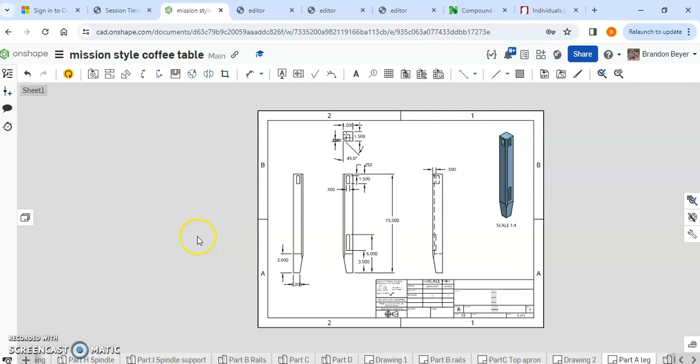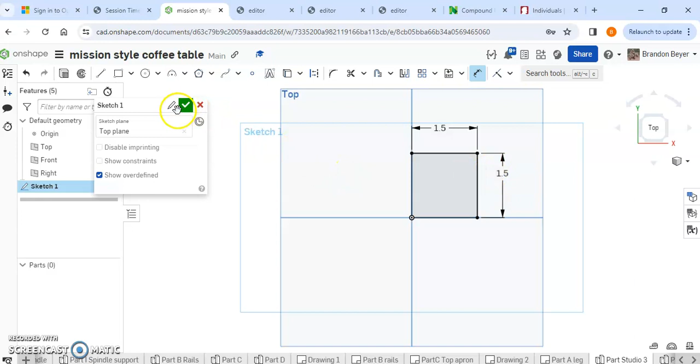Starting from scratch, using Onshape, we're gonna make a sketch on the top view, and we're just gonna start with a nice rectangle. The outer dimensions of this leg are 1.5 by 1.5. We're going to extrude that 15.5 inches, so we're going to make that 15.5.

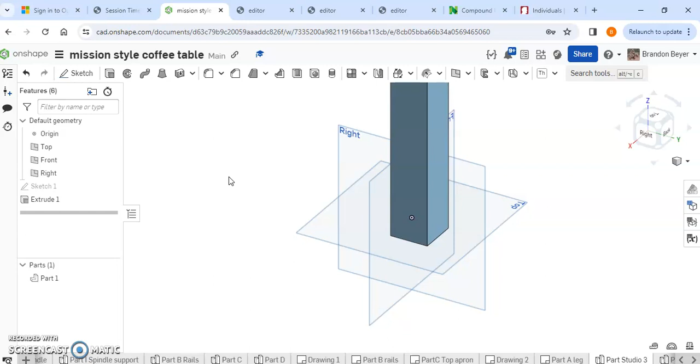We're in fast mode, folks. You got to pay attention. You got to work fast. If not, you'll have to pause this video and go back and watch it again.

So we're already 15.5, we got the bulk of the leg already done. 2 steps. Nope, we're on a video, you're going to watch it later. I'm recording right now, your voice is now in the video permanently. Congratulations.

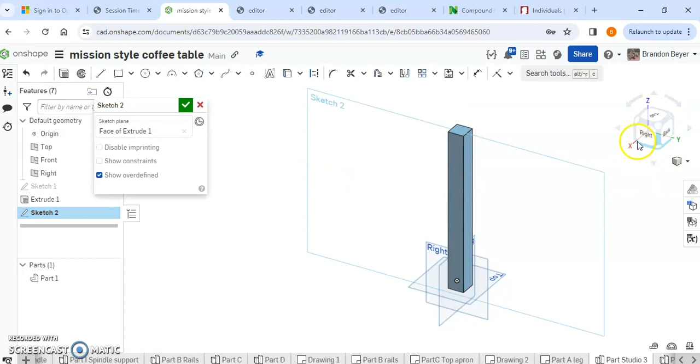Sketch, we're going on the left side here. I'm just going to draw 2 rectangles down here. You do not want those rectangles to be touching anything, so I'm just clicking a random rectangle in the middle there. I'll do the top one first.

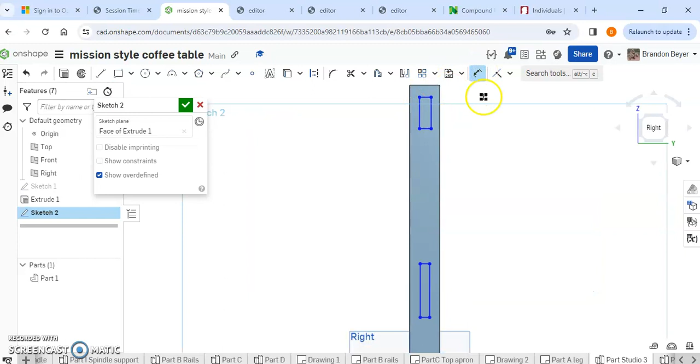Top edge down, that's going to be 0.25. Bottom of that top rectangle, if we look at our plans, it tells us that that is 1.5 inches down. How are you going to center your rectangle? It's going to be 0.5, and then I'm going to go to the edge, also 0.5.

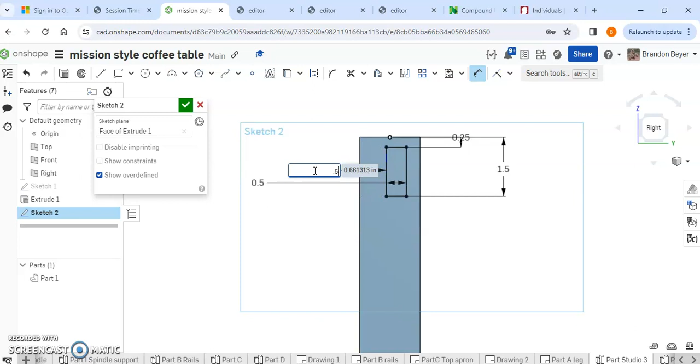Down here at the bottom, we're going to set that to 3.5. And then we got the top line, that's 6 inches.

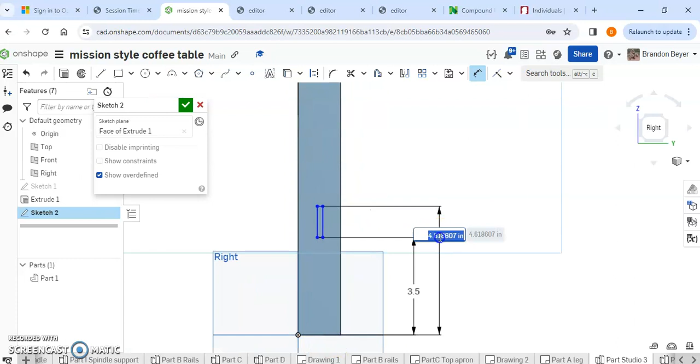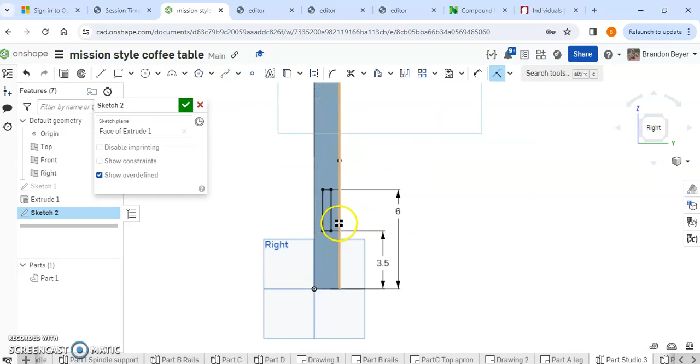Rather than dimension this for the width, I'm just going to make it coincident to the top one. So left line, right line, right line. So those 2 are done. Green check mark, we go ahead and extrude that, remove, click, click.

This is going to default to 1 inch, which honestly the holes can be anywhere between 0.5 and 1 inch and it'll still be fine. I'm going to go ahead and leave it at 1 inch for now.

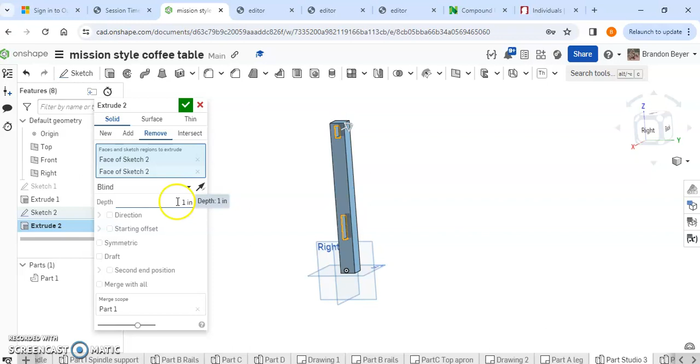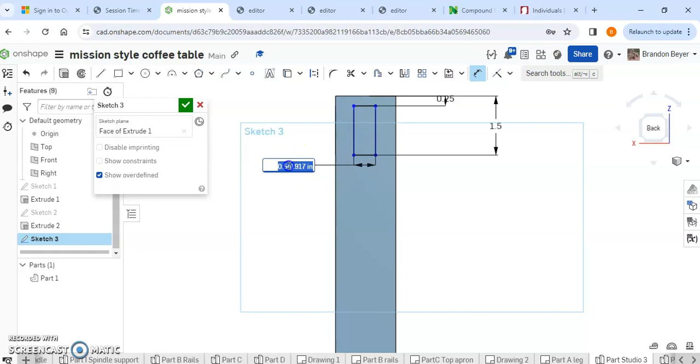So it's important to note that this hole is not 1.5 long, it's 1 1/4. The 1.5 is from the top of the leg. I could see people messing that up pretty easily. Also, make sure you center the hole. There's a 1/2 inch to the left, 1/2 inch to the right, and the hole itself is a 1/2 inch. Remember, the whole leg is 1.5.

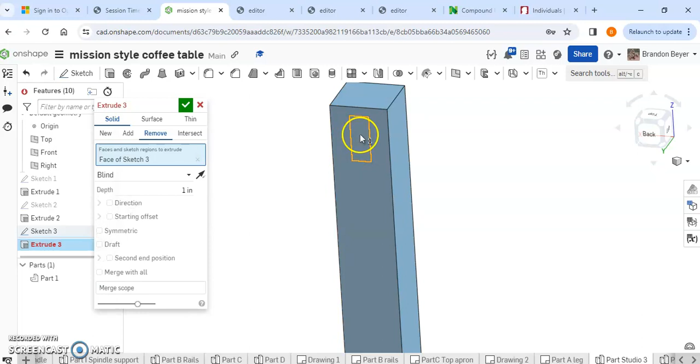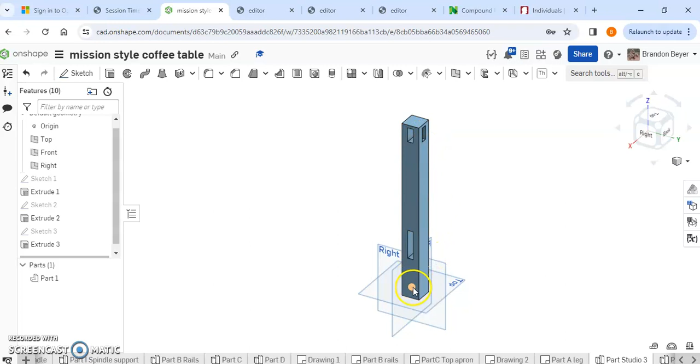All right, so we've got our 3 holes in the leg. Now we're going to chisel off the bottom corner. You want the chiseled edge to be in between the 2 holes. So I'm going to draw a little triangle here on the right, and then on this side I'm going to draw it on the left. You'll see what I mean in a second.

So I'm just going to make a sketch. Gentlemen, keep it down. You should be focusing on the video here. No, I told you I already got lost. Shh, watch.

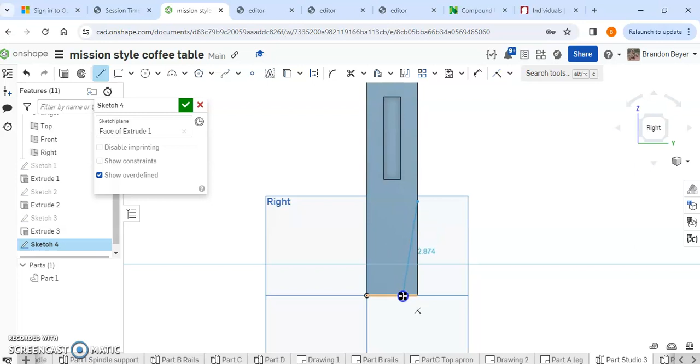Random diagonal line, no dimensions yet. I'm going to set this top point to the bottom, that is 3. DJ, he is not answering questions. At the bottom, we've got 1 inch. Notice that line is now nice and black.

That means it's defined. If we go to try to cut this off right now, it's probably not going to let us select this because this line and the bottom are not part of that sketch, they are somewhere else. So if we click the use button, we can actually make that part of the sketch just by clicking on it.

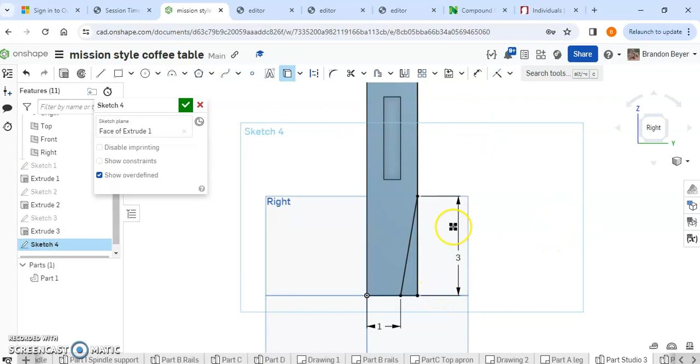Now we've got a solid triangle here that we can select. I go to extrude, I select that triangle. I'm not adding material, I am removing material. I'm going to make that through all, and that's going to chisel that side off.

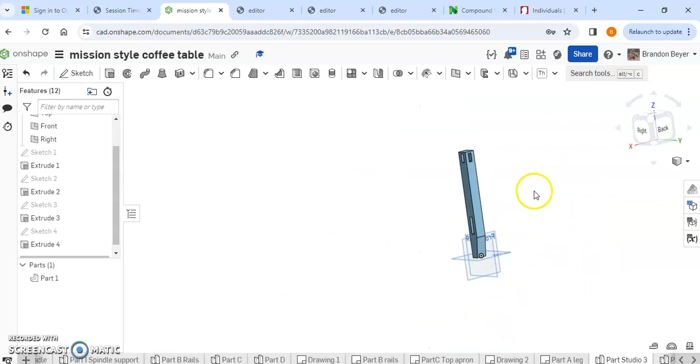Now when we do the right, which is actually the back because I drew this thing crooked, this part's going to screw up a lot of people. If you're not paying attention, you're going to miss out on this important step, and you're going to have all kinds of problems, not know why.

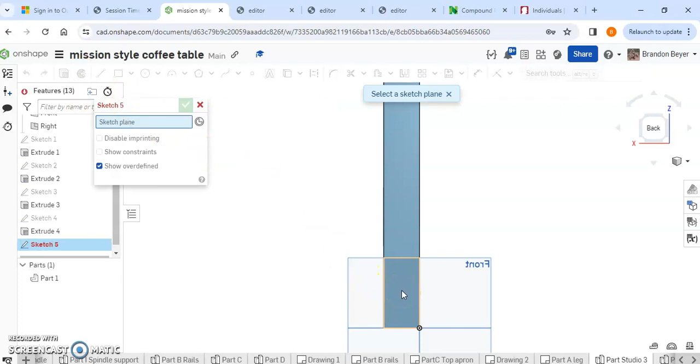When you make this sketch, if you create the sketch down here on the sloped surface, see how that's angled? Your extrusion will then also be angled. You have to make the sketch up here on the flat surface. So click the flat surface to make your sketch on, and then you're going to draw it down here.

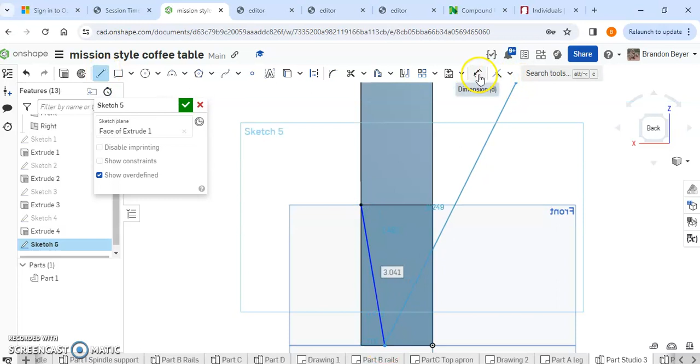And I'm going to dimension it one more time, 1 inch. It's already pulling that information from my previous drawing. Pull out those lines with the use tool, and now we can extrude remove this.

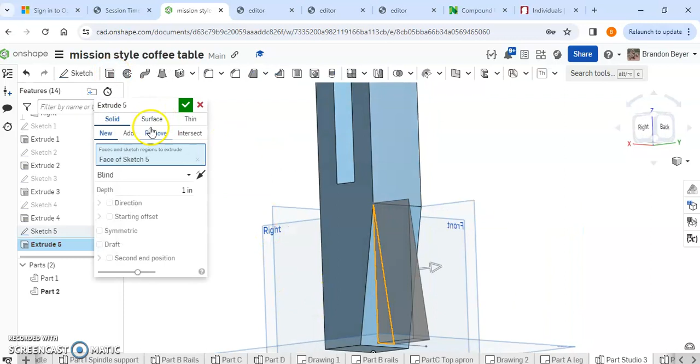So let me just show you this real quick. See how my sketch is flat and kind of floating away from the surface? That's because I drew my sketch based off of this plane. We're going to go through all, green check mark. Now you've got your chiseled bottom.

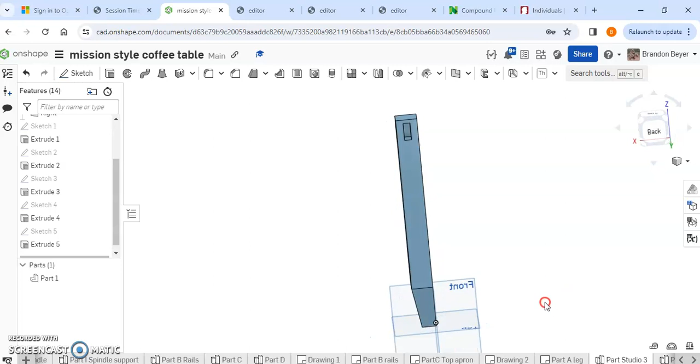Definitely should have done this during first period.

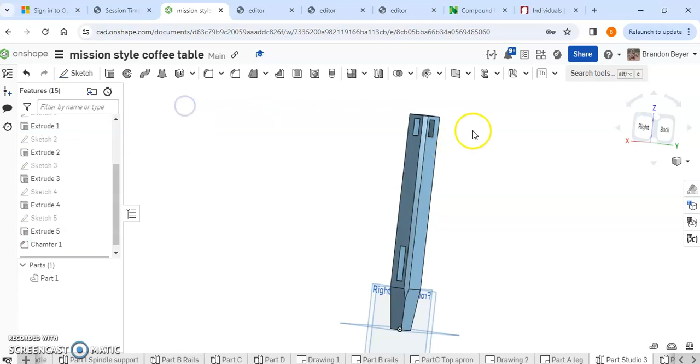Chamfer, we're going to chamfer this inside corner. I'm just going to set that to equal distance and make it 0.25. Green check mark, and that's going to give me a chamfer. You could have also done this at the very beginning when you drew that square and just knocked the corner off, that would have been another option for that.

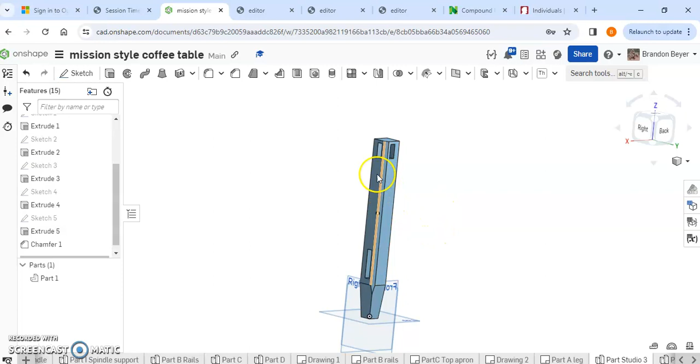All right, that leg is done. But I need a left leg, or should I say I need a right leg. So I'm going to duplicate this entire thing. Mirror, part mirror, so I'm going to grab part 1.

And it might default to add or remove, but you want to do a new, you want this to be a new part. Mirror plane, just grab one of these edges in between. There's your other leg, now you've got 2 legs.

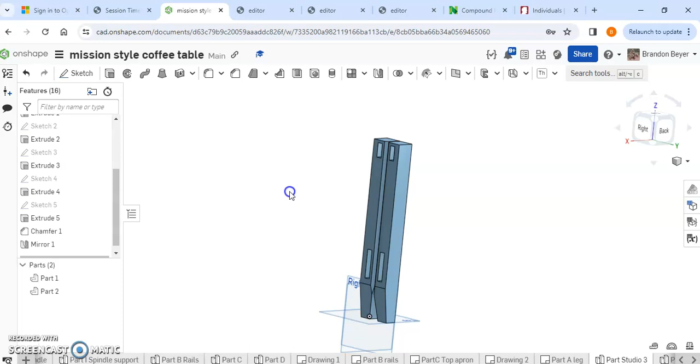Unfortunately, your legs are touching each other. You need to space them out so you can see what's going on. So we need to use transform, that can be found under the Boolean tool, transform.

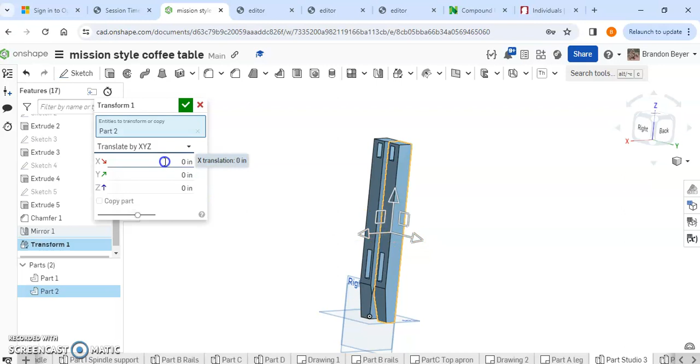I grab part 2, transform by the XYZ coordinates, and if this is actually the x-axis like it should be, I can type in 3 here and it should move. That's not the x-axis, it must be the y. So let's go y-axis, and there we go. We moved it over 3 inches, green check mark, and we are good to go.

Almost 9 minutes flat, that's your part. Part A, leg, you've got a left and a right.